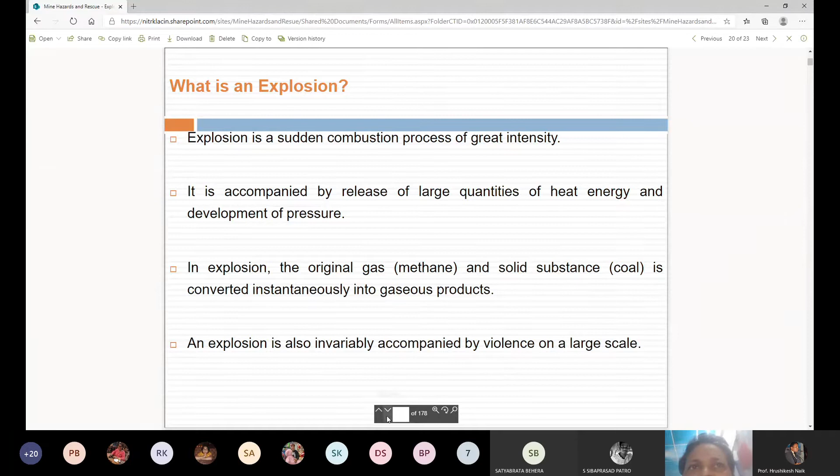In an explosion, the original gas, that is methane, and solid substances like coal dust are converted instantaneously into gaseous products. So when methane comes in contact with oxygen, an explosion takes place with an instantaneous large volume of gaseous products. Because of the reaction between methane and oxygen, the gaseous products are developed with high pressure. Therefore, an explosion is also invariably accompanied by violence on a large scale. So if there is an explosion, there will be a large-scale violence hazard in the mines. This we have discussed in coal mine explosions.

These mine explosions are generally regarded as a serious and constant hazard, particularly in underground coal mines. They are regarded as a very serious and hazardous activity. In coal mines, explosions are caused by three reasons. Ignition of fire damp, which is called a fire damp explosion. Ignition of coal dust, which is called a coal dust explosion. Or a combination of these two, fire damp and coal dust together, which is called a mixed explosion.

This is all about coal mines. But in metal mines, explosions are due to sulfide dust, iron pyrite. In metal mines, sulfide is present, and sulfide dust can also catch fire. So sulfide dust, iron pyrite, is responsible for fires or explosions in underground metal mines.

Okay. So in India, during 1900 to 1980, there were 21 explosions. The worst disaster due to a mine explosion took place in Dhori Colliery in 1965, when 268 miners were killed. You see the gravity of this hazard. The coal mine explosion is very, very dangerous, because in one instance in Dhori Colliery in 1965, 268 miners were killed.

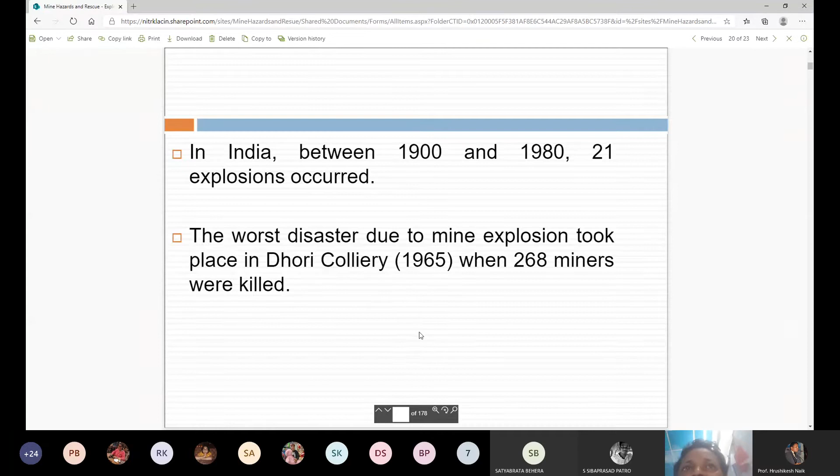That is why the subject is very important for the mining engineer, to understand the mechanism of explosion. That is the reason we are giving much more emphasis on explosion, which is a great hazard in underground coal mines. This methane explosion is also called a fire damp explosion. Fire damp is nothing but methane plus oxygen when they come in contact with each other in the atmospheric air. So a fire damp explosion takes place.

The term fire damp refers to the natural gas mixtures emanating from the strata of coal mines. From the coal mines, methane gas is emitted, and when it comes in contact with oxygen, fire damp is formed. Such gas mixtures consist chiefly of methane. So what is fire damp? It is nothing but methane with small traces of other combustible gases like ethane C2H6 and ethylene C2H4. Therefore, fire damp is often considered synonymous with methane. The other name of methane is fire damp.

Methane burns in air when ignited with a pale blue flame. We have seen this in an earlier class also. But when it is mixed with the air, it can also explode on ignition. If an ignition source is there, then it can explode. So if there is an explosion, this is the chemical reaction going to take place: CH4 plus 2 times O2 plus 4N2. The end products are gaseous products.

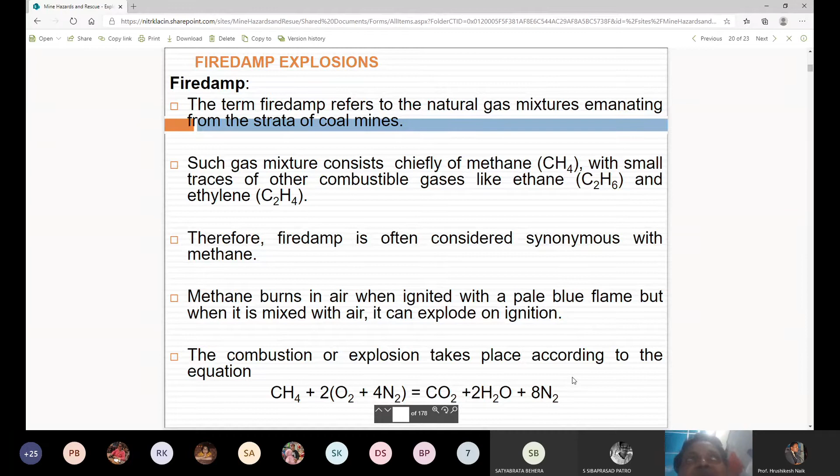Whenever methane comes in contact with oxygen in the atmospheric air combined with nitrogen, nitrogen is a neutral gas, so it is not responsible, but oxygen is the main ingredient for the reaction, and the end products are gaseous products like carbon dioxide, nitrogen gas, and water vapor, produced after the methane is burned in the explosion. So this is the chemical reaction which takes place during a fire damp explosion, a methane explosion. There are two factors responsible for a fire damp explosion to take place. Fire damp in inflammable, explosive proportions, that is, mixed with the right amount of air, should be there.

So when the explosion is going to take place, if the right amount of air is there along with methane, a mixture is formed, which is called your explosive mixture. So if the proportion is explosive in nature, then explosion is going to take place. A suitable igniting agent should be there. We have discussed in the previous classes, in the fire triangle, in the explosion pentagon, that there should be an igniting agent, then only explosion is going to take place.

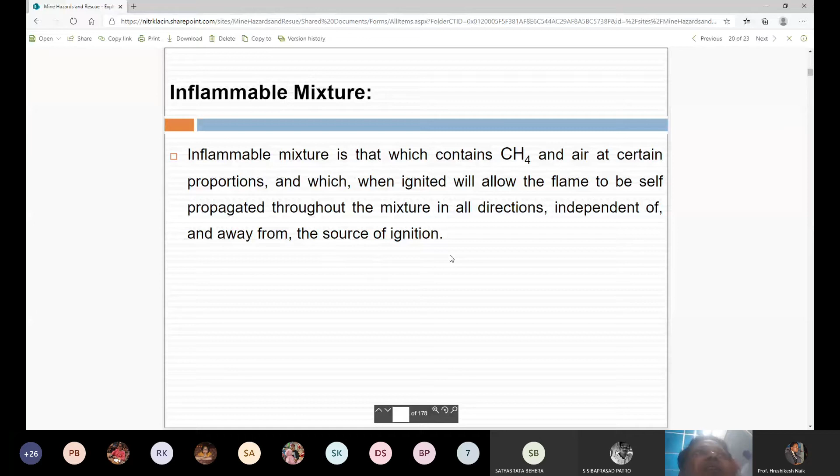So what is an inflammable mixture? The inflammable mixture is that which contains methane and air at certain proportions, and which when ignited will allow the flame to be set off, to be self-propagated throughout the mixture in all directions, independent of and away from the source of ignition. That is called an inflammable mixture. So there we have discussed also the limits of flammability, flammable limits or explosive limits. What is flammability limit? What is explosive limit? We have discussed in the previous classes.

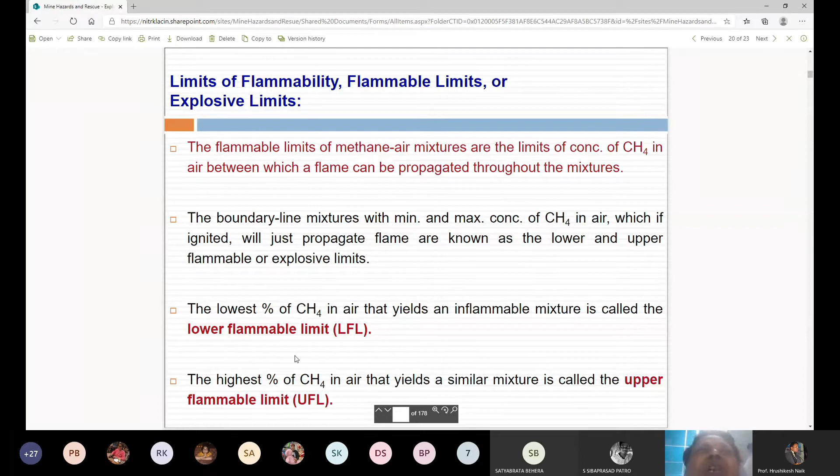The flammable limits of methane air mixtures are the limits of concentration of methane in air between which a flame can be propagated throughout the mixtures. The boundary line mixtures with minimum and maximum concentration of methane in air, which, if ignited, will just propagate flame, are known as the lower and upper flammable or explosive limits. So therefore, the lower flammable limit is the lowest percentage of methane in air that yields an inflammable mixture. Similarly, the upper flammable limit is the highest percentage of methane in air that yields a similar mixture. So this we have also discussed in the previous classes.

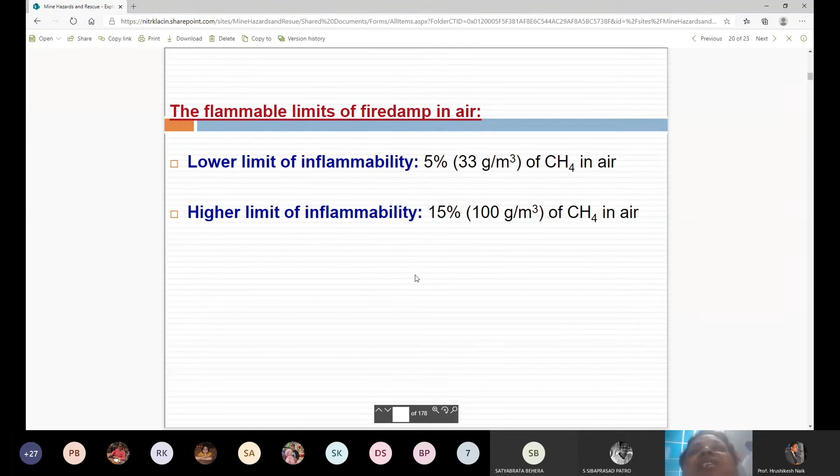So usually the lower limit of inflammability is 5%, higher limit of inflammability is 15%, 5% to 15% methane. If the methane concentration is 5%, it is called lower limit of inflammability. And if methane percentage is 15%, it is called higher limit of inflammability. So you should remember the lower limit of inflammability, which is 33 gram per cubic meter of air. And similarly, the higher limit of inflammability is 100 gram per cubic meter of the air, which is called 15%.

So the presence of other combustible gases like ethane, carbon monoxide, hydrogen, etc., reduces the lower flammable limit of the mixture. If along with methane, ethane, carbon monoxide, hydrogen is present, then it will reduce the lower flammable limit of the mixture. So the lower flammable limit of a mixture of gases can be determined by using this formula, which is called your Le Chatelier relationship. 100/L = P1/L1 + P2/L2 + P3/L3, etc. Where P1, P2, P3 are the percentages of component gases in the mixture. So P1, P2, P3 total should be 100.

Suppose 3 gases or 4 gases are present: methane, ethane, carbon monoxide, hydrogen. In a sample of air, if these 4 gases are present, their sum should be 100. So suppose methane is 5%, ethane is 10%, carbon monoxide is suppose 10% or 5% or 1%, hydrogen is 50. Total, this addition should be 100. Okay, so this is the formula used for calculating the lower flammable limit L.

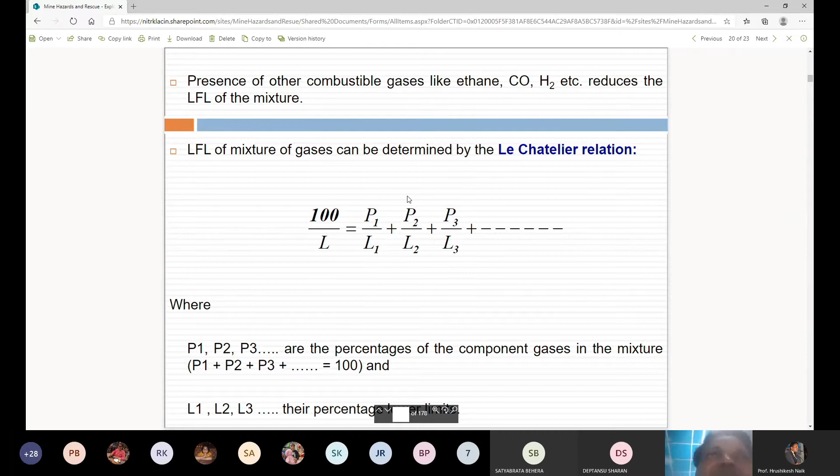And what is this L1, L2, L3? They are percentage lower limits. Percentage lower limit of methane, percentage lower limit of ethane, percentage lower limit of carbon monoxide, percentage lower limit of hydrogen. So if you put these values in this equation, you'll be able to calculate capital L, which is the lower flammable limit of the gas mixture if it contains a number of gases.

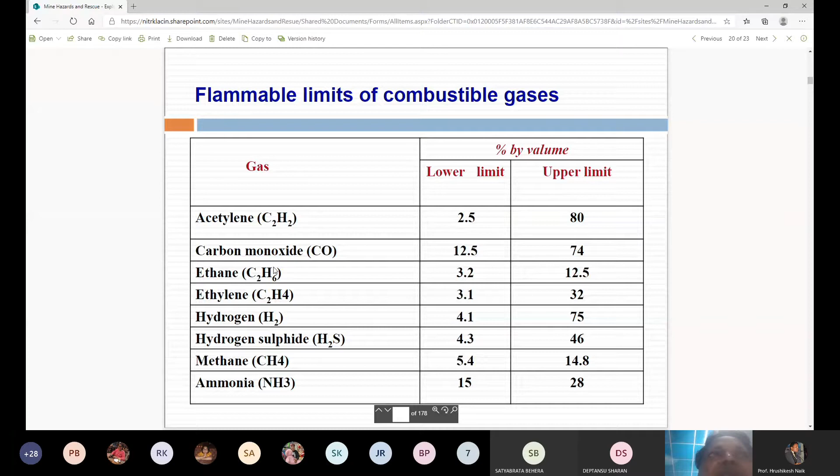So if you see this table, flammable limits of combustible gases, acetylene lower limit, upper limit is given. Carbon monoxide lower limit, upper limit is given. Ethane, ethylene, hydrogen, hydrogen sulfide, methane. We are interested in methane gas, CH4. Methane lower limit of explosion is 5.4, upper limit 14.8. Okay. So this is the table which gives you the lower and upper limits of flammability of different types of gases.

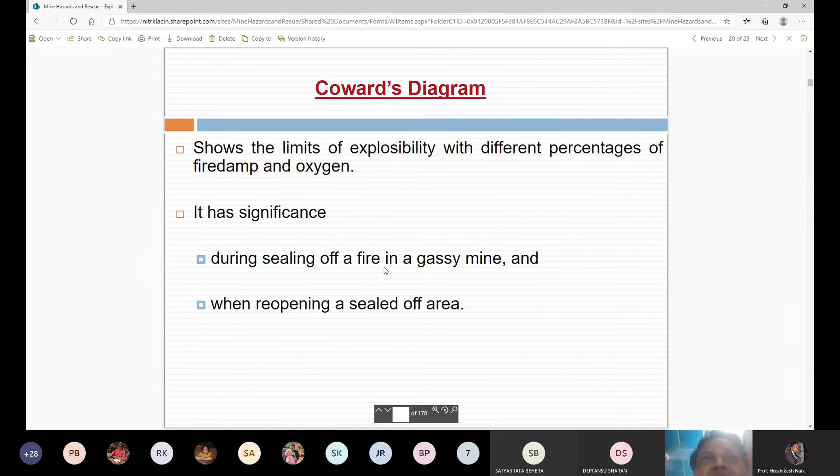So there is one diagram used for the explosion purpose, which is called your Coward's diagram. What is a Coward's diagram? It shows the limits of explosibility with different percentages of fire damp and oxygen. It has got significance during sealing off a fire in a gassy mine and when reopening a sealed up area. So you need this Coward's diagram for sealing of a mine fire in a gassy mine and reopening of a sealed up area. Let us see. This diagram is called your Coward diagram.

So if you draw a graph between methane and oxygen, on this side, methane percentage is there. Methane percentage 0%, 2%, 4%, 6%, 8%, 10%, 12%, 14%, 16%, 18%, 20%. This is the methane percentage. On this side, the methane percentage is given. On this axis, oxygen percentage is given.

2%, 0% oxygen, 2% oxygen, 4%, 6%, 10%, 12%, 14%, 16%, 18%, 20%, and 22%. So if you draw the graph, you'll get a triangle here. X, Y, Z is the triangle, which is called the explosive triangle. This triangle is called the explosive triangle, and this whole diagram is called Coward's diagram.

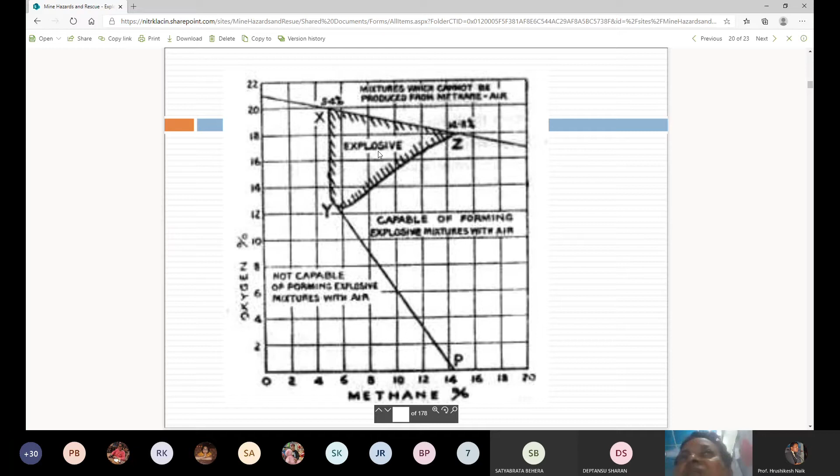Okay. So this is the area XYZ. XYZ is the triangle in which explosion is very dangerous. XYZ is the explosive area. The material can catch fire and explode. Explosion can take place. Okay. So that is the upper limit, or higher limit, of explosivity.

Then no percentage of fire damp is explosive when oxygen is 12% or less. This you should remember. If oxygen in the atmosphere is less than 12%, fire damp explosion is not going to take place. A fire damp air mixture may become explosive when diluted with an appropriate quantity of air, which brings the new mixture within the limits of the triangle XYZ.

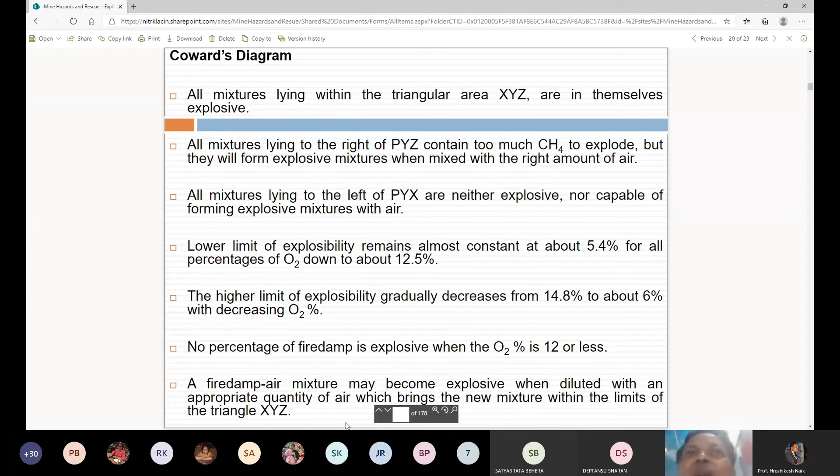So, what are the factors which affect the inflammable limits? The limits of flammability are not fundamental characteristics of the gas, but depend on the experimental conditions. The limiting mixtures of flammability are influenced by the presence of other combustible or inert gases, temperature, pressure, intensity of turbulence. We have discussed in earlier classes the factors which affect the inflammable limits.

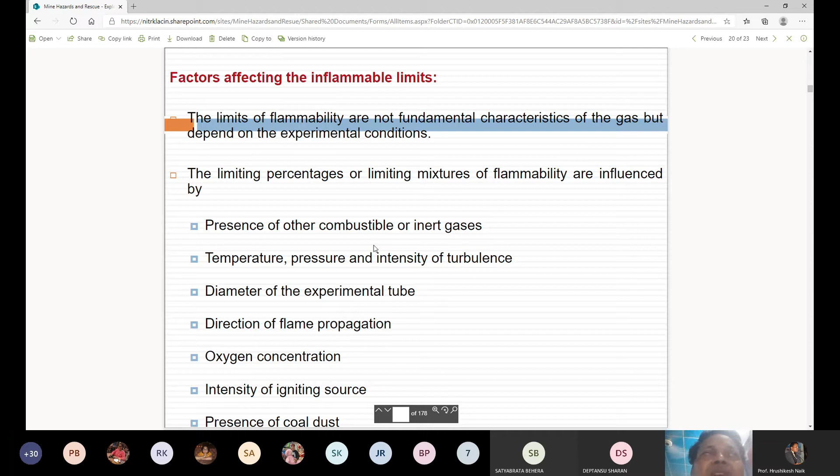Temperature is one factor, pressure is one factor, turbulence is another factor, diameter of the experimental tube, direction of flame propagation, oxygen concentration, intensity of igniting source, presence of coal dust. So these are the factors which affect the inflammable limits.

Okay. So what is ignition temperature? We have discussed it. The lowest temperature to which an inflammable mixture must be raised in order to set the mixture aflame is called the ignition temperature or ignition point. To get the fire, the lowest temperature which is necessary is called the ignition temperature or ignition point.

The ignition point of pure methane in oxygen is 550 degrees centigrade. You should remember this for quiz type questions. Similarly, the ignition temperature of fire damp air mixtures is usually taken as 650 to 750 degrees.

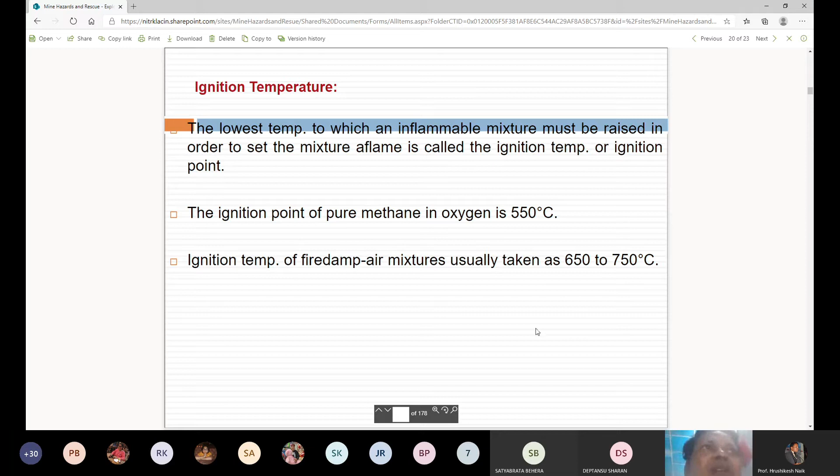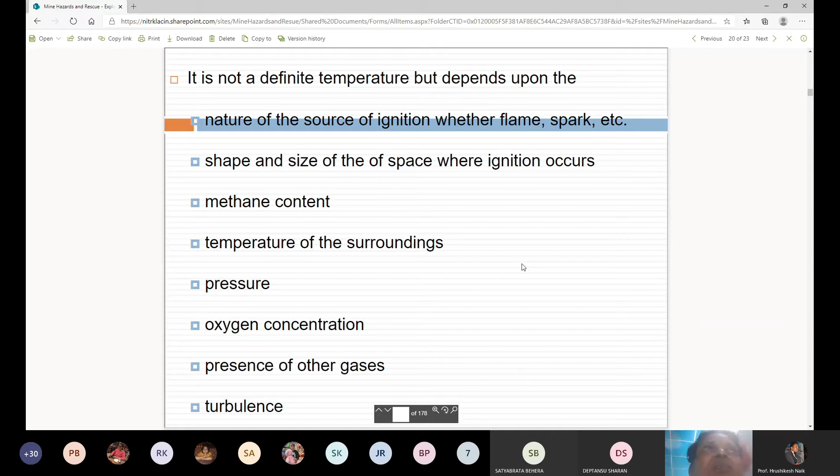So it is not a definite temperature. Ignition temperature is not a definite temperature, but depends upon the nature of the source of ignition, whether flame or spark is there, shape and size of the space where ignition is going to occur, methane content, what is the percentage of methane present in the atmosphere, temperature of the surrounding air, pressure and oxygen concentration, presence of other gases like nitrogen, hydrogen, carbon monoxide, carbon dioxide, turbulence. All these factors are the reason for the flammability temperature.

So then what is lag on ignition? The fire damp air mixture does not immediately burst into flame when it has been raised to its ignition temperature. There is some lag. So immediately it is not going to explode or catch fire. There is some time lag, which is called lag on ignition. The latter temperature must be maintained for a definite interval of time to ensure that flame will appear.

The interval of time that elapses between the exposure of a methane air mixture to an igniting source and the appearance of flame is called the pre-flame period, which is also called lag on ignition. The duration of this period is called lag on ignition. So suppose there is an explosive mixture of methane and air in the atmosphere, and there is an ignition source. The ignition source will not immediately ignite the methane gas. It will take some time. That time period is called lag on ignition.

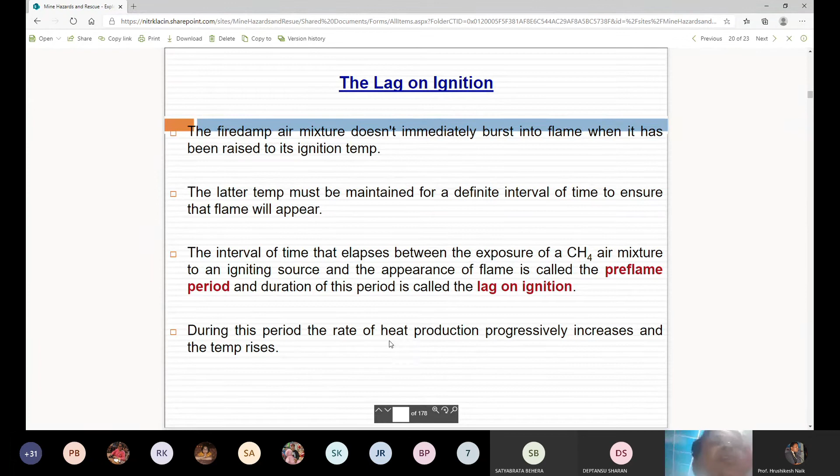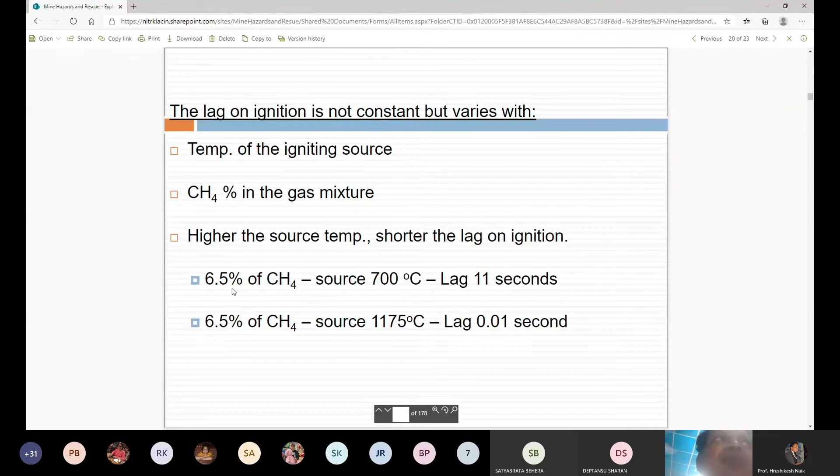During this period, the rate of heat production progressively increases and the temperature also rises. The lag on ignition is not constant, but varies with temperature of the igniting source and methane percentage in the gas mixture. Higher the source temperature, shorter the lag on ignition. For example, with 6.5% methane and a source of 700 degrees centigrade, lag time is 11 seconds. If the source is 1175 degrees centigrade, very high temperature, the lag period would be only 0.01 seconds. So this is the relationship between the methane percentage and the source of ignition.

Then we have also discussed what is direct blast and what is backlash. Methane explosions are characterized by two distinct phases. One is called direct blast, the other is called backlash, which is also called the indirect blast. In the case of a direct blast, a pressure wave of great force and speed travels ahead of the explosion flame. But the backlash is caused by the vacuum arising out of cooling of explosion gases and condensation of water vapor.

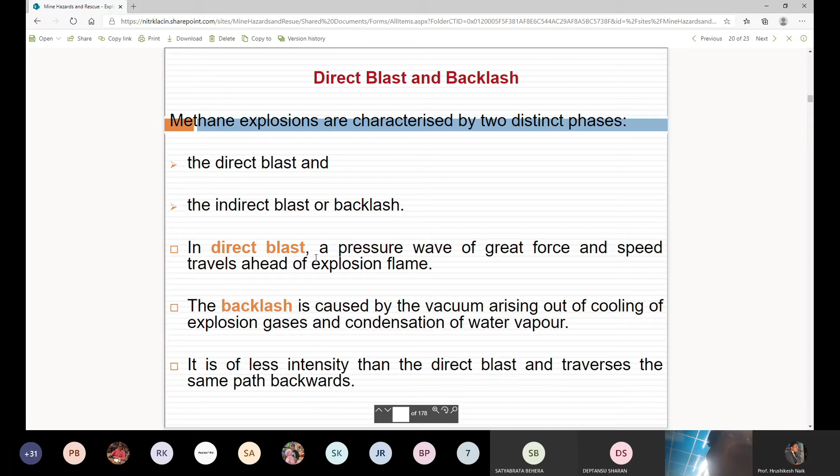So it is of less intensity. Backlash is very much less intense compared to direct blast. And it travels in the opposite, backward direction. That is why it is called backlash. But direct blast travels in the forward direction. Direct blast is very dangerous. Backlash is less dangerous. So explosion flames: whenever there is an explosion, you'll get the fire, you'll get the flame.

So what are explosion flames? We have seen that 9.5% is the optimum concentration level of methane gas. Whenever the concentration of methane is greater than 9.5%, two types of explosion flames may occur, the primary flame and the secondary flame. Primary flame propagates at a greater velocity and consumes the entire available oxygen in the atmosphere. Whatever oxygen is available, the primary flame consumes every part of it.

But the secondary flame is produced by the burning of unburnt gas with the help of the oxygen supplied by the backlash. It propagates in the opposite direction to that of the primary flame at a lower velocity. That is why the backlash is not very dangerous, because the flame travels at a lower velocity, and it travels in the opposite direction. In the case of the direct blast, the flame travels in the forward direction. But in the case of a backlash, the flame travels in the backward direction.

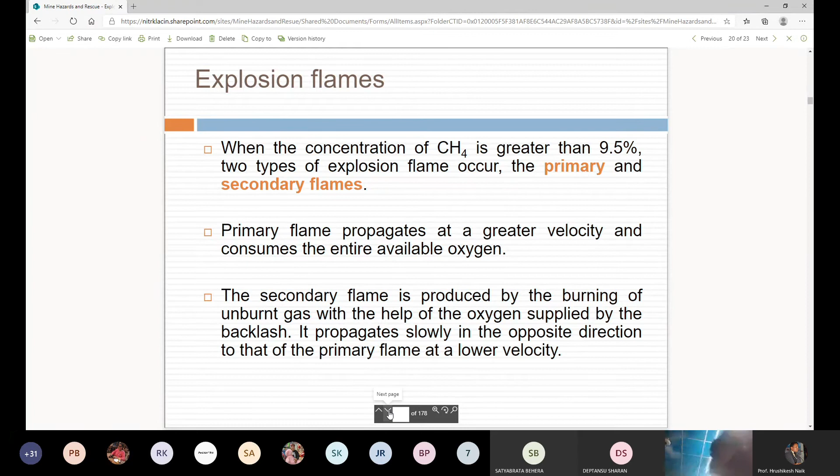So what is the effect of high pressure and temperature? If the pressure is very high and temperature is very high, what will happen? By suddenly compressing the gas mixture, both temperature and pressure are raised simultaneously. And it has been found possible to ignite in this way a mixture containing as little as 2% and as much as 75% of methane.

We have seen that the lower limit of methane concentration is 5%. But if you compress the methane gas and raise the temperature, it can also be explosive at 2%. At 2% of methane, there may be an explosion if very high pressure and high temperature are there. Similarly, if the methane percentage is 75% in the atmosphere, with high pressure and temperature they can also explode. You got my point?

What I explained to you means we have studied that 5% is the minimum percentage of methane responsible for a methane explosion. But if you compress the methane gas, its temperature is going to increase, pressure is going to increase. So even at 2% of methane, they are going to explode. Even at 75% of methane, they are going to explode.

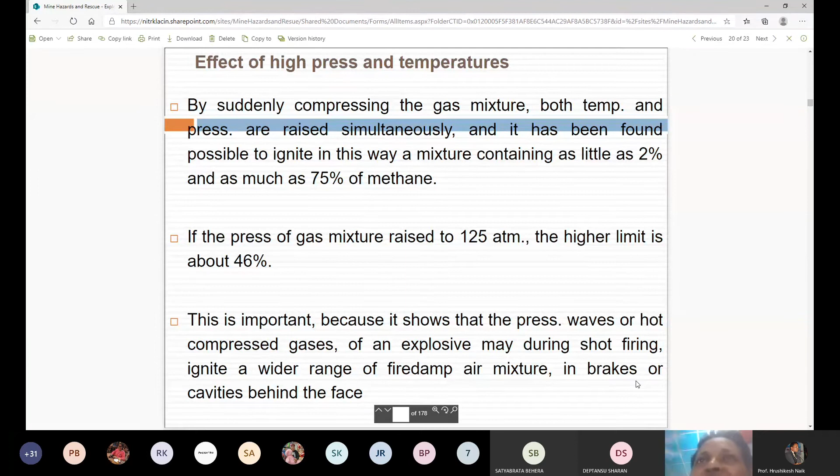So if the pressure of the gas mixture is raised to 125 atmospheres, the higher limit is about 46%. If the gas pressure is raised to 125 atmospheres, then the higher limit of methane percentage is 46%. This is important because it shows that the pressure waves or hot compressed gases of an explosive may, during shot firing, ignite a wide range of firedamp-air mixtures in breaks or cavities behind the face.

Then, what is the effect of black damp on inflammability? So we have seen firedamp, that is methane. And what is black damp? It is a mixture of carbon dioxide and excess nitrogen, and it has very little effect in diminishing the danger of an explosion. Black damp has very little effect in diminishing the danger of explosion.

For all percentages of excess nitrogen or of ordinary black damp up to 35%, the lower limit of inflammability remains unaffected, being between 5% and 6%. The higher inflammability limit is 14.8% when no black damp is present, and it gradually falls to about 6% as the percentage of black damp increases to 35%. The upper limit and the lower limit then coincide. Okay, when the percentage of black damp is greater than 35%, what will happen?

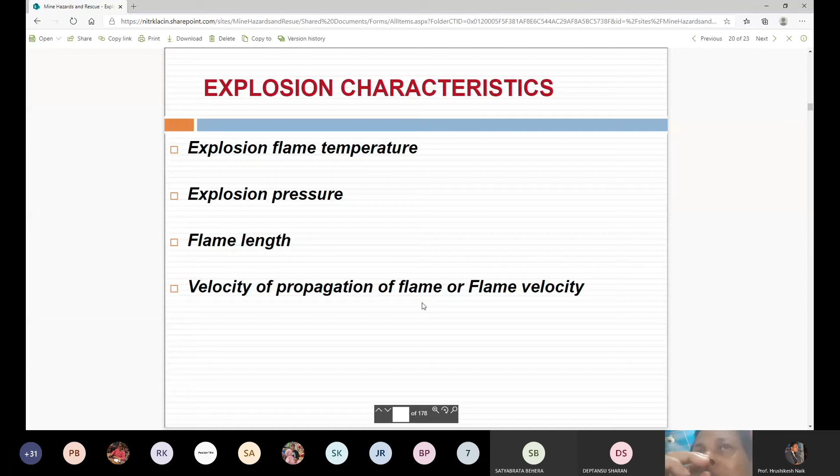So the explosion characteristics we have also discussed: explosion flame temperature, explosion pressure, flame length, velocity of propagation of flame or flame velocity. So what is flame temperature? It is the temperature which occurs just at the moment of explosion of a flammable firedamp mixture. It depends upon the concentration of firedamp, uniformity of the mixture, turbulence, confinement, and heat losses. It is maximum at the stoichiometric concentration and is less at the lower and upper flammable limits.

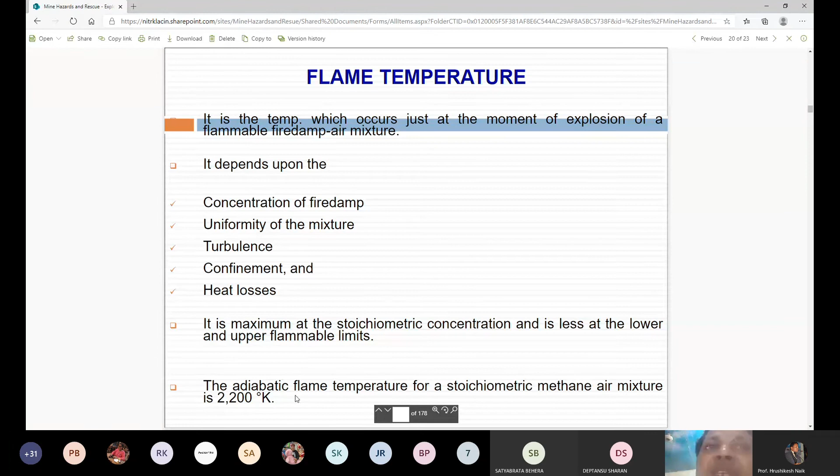The adiabatic flame temperature for a stoichiometric methane-air mixture is 2200 Kelvin. This you should remember. In the quiz, you may be asked this question. So that is why you should remember it is 2200 Kelvin. Okay.

Then what is explosion pressure? It depends upon the flame temperature and confinement area. The maximum explosion pressure of a methane-air mixture at atmospheric pressure of 760 millimeters of mercury at 20 degrees centigrade, which is standard pressure and temperature, when ignited in a closed vessel is 7.2 bar. 7.2 bar. This also you should remember.

The maximum explosion pressure of a methane-air mixture is 7.2 bar at an atmospheric pressure of 760 millimeters of mercury and 20 degrees temperature, when ignited in a closed vessel.

But in mine workings, explosion pressure is much higher than this, more than 7.2 bar, because the shock wave traveling ahead of the explosion flame compresses any firedamp accumulation encountered on its way to a pressure greater than 1 bar. Upon ignition of such an accumulation, the resulting explosion pressure will be much greater than 7 bar. Therefore, severe damage due to explosions does not occur at the seat of explosion, but away from it.

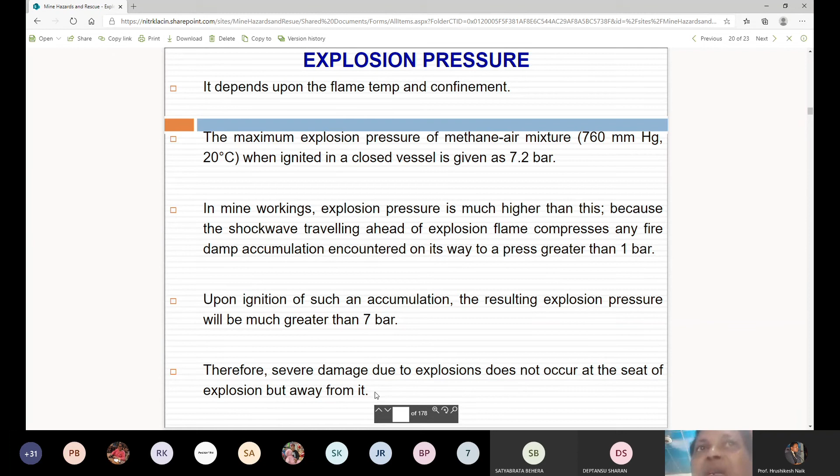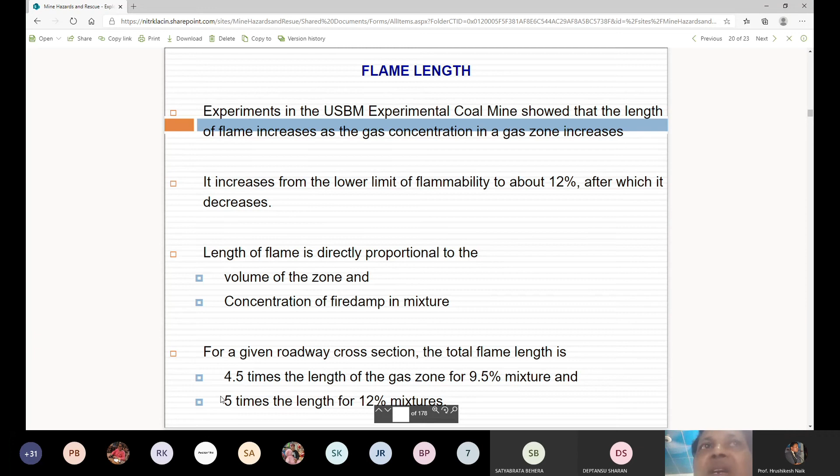Then what is flame length? Experiments in the United States Bureau of Mines experimental coal mine showed that the length of flame increases as the methane gas concentration in a gas zone increases. It increases from the lower limit of flammability to about 12%, after which it decreases. Length of flame is directly proportional to volume of the zone and concentration of firedamp in the mixture. For a given roadway cross section, the total flame length is 4.5 times the length of the gas zone for a 9.5% mixture and 5 times the length for a 12% mixture.

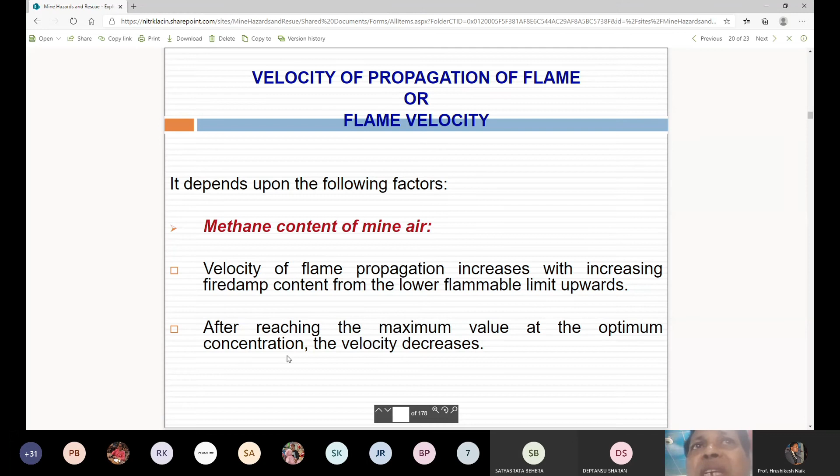Then what is velocity of propagation of flame, or flame velocity? It depends upon the following factors. Methane content of the mine air: velocity of flame propagation increases with increasing firedamp content from the lower flammable limit upwards. After reaching the maximum value at the optimum concentration, the velocity decreases.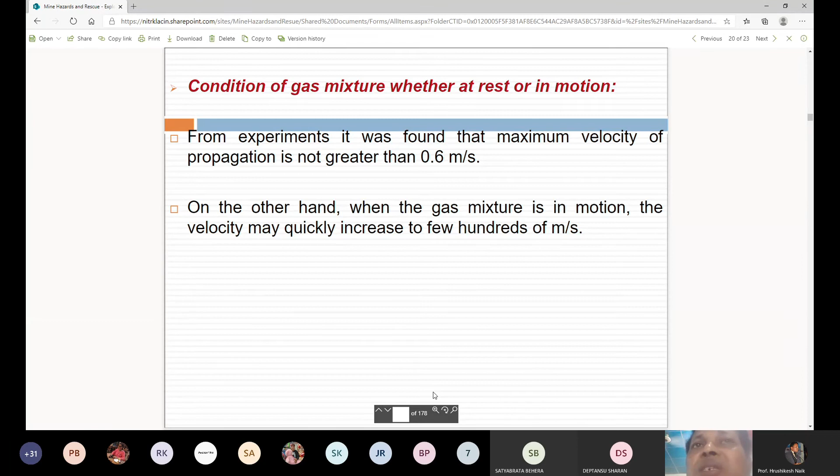Then, the condition of the gas mixture, whether at rest or in motion. From experiments, it was found that the maximum velocity of propagation at rest is not greater than 0.6 meter per second. On the other hand, when the gas mixture is in motion, the velocity may quickly increase to a few hundreds of meters per second.

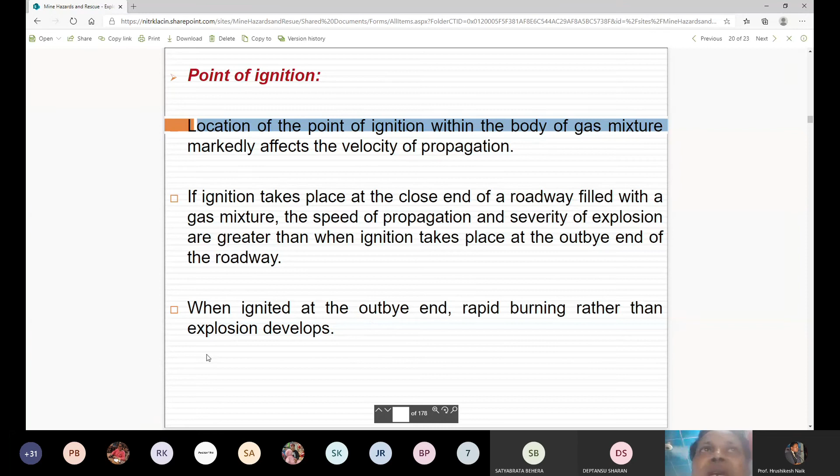Then, point of ignition. The location of the point of ignition within the body of a gas mixture markedly affects the velocity of propagation. If ignition takes place at the closed end of a roadway filled with gas mixture, the speed of propagation and severity of explosion are greater than when ignition takes place at the out-by end of the roadway. When ignited at the out-by end, rapid burning rather than explosion develops.

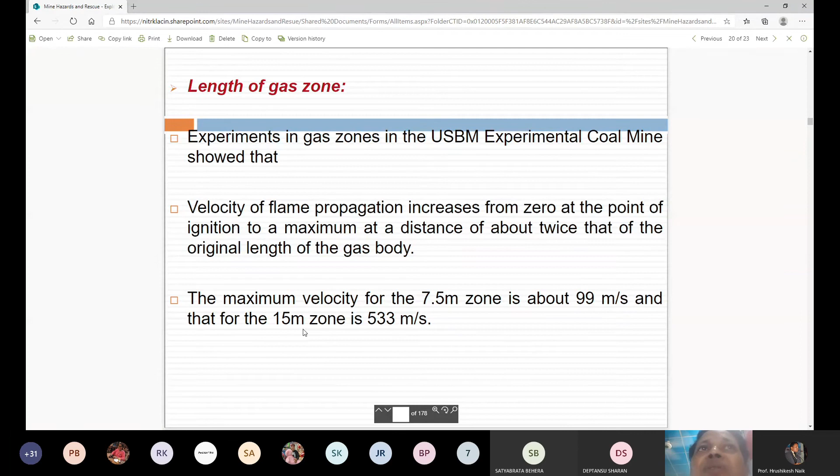Then, the length of the gas zone. Experiments in gas zones in the United States Bureau of Mines experimental coal mine showed that velocity of flame propagation increases from 0 at the point of ignition to a maximum at a distance of about twice the original length of the gas body. The maximum velocity for the 7.5 meter zone is about 99 meters per second, and for the 15 meter zone is 533 meters per second.

Then, the presence of obstacles in the path or change in area of roadway cross section. Obstacles cause turbulence of the air and greatly increase the flame speed. Presence of objects like wooden props, steel props, mine tubs, ventilation doors, brattice cloths decreases the area of cross section, and the velocity of propagation rises to a few hundreds of meters per second.

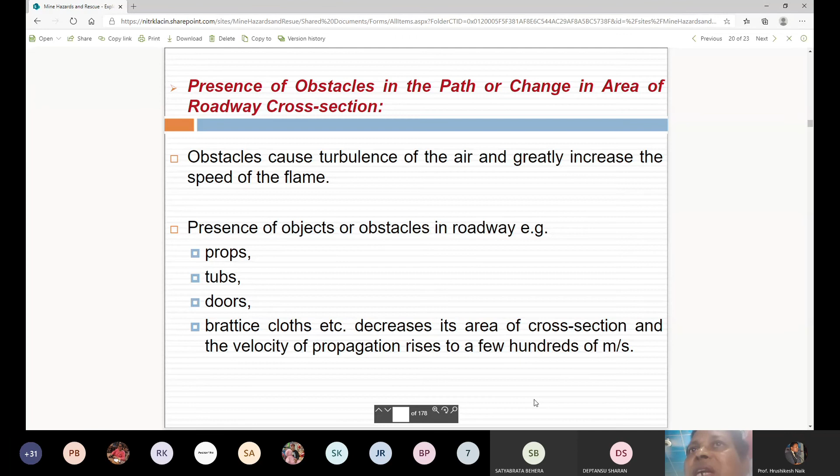So in the next class, which will be held on Tuesday at 3:15 p.m., we are going to discuss the causes of firedamp explosions in coal mines. So this is all about today's class.